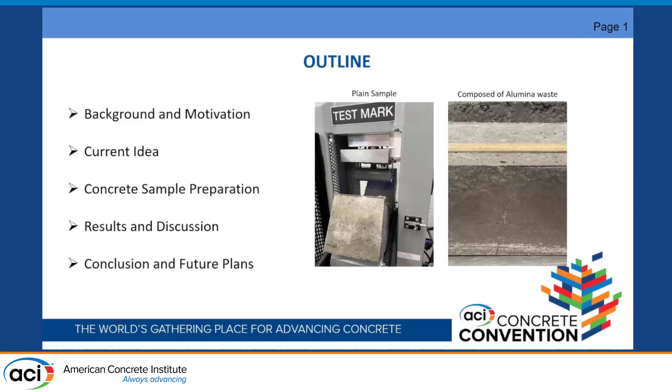My name is Kyle Ingersoll. I'm currently an undergrad research student at Alfred State. Today I'm going to be talking about some eco-friendly concrete, utilizing recycled glass and alumina waste in the mix for a more sustainable construction. So we're going to talk about some background and motivation, our current idea, some of our sample and testing, and then we'll look at the results and make some conclusions there.

So the original idea for this project came from Governor Kathy Hochul's announcement in 2023. She's put over $20 million in funding work for sustainable management practices in conjunction with the New York State College of Ceramics at Alfred University. This is the school that we partnered with. They're right across the street from Alfred State, so it works out quite nicely.

And they are the #1 school in the nation for ceramic engineering and I think #2 in glass research. So they're a big deal. We're very fortunate to have them so close and willing to help us out. So this was kind of the motivation: the governor pushing for more of this and adding some funding to this research.

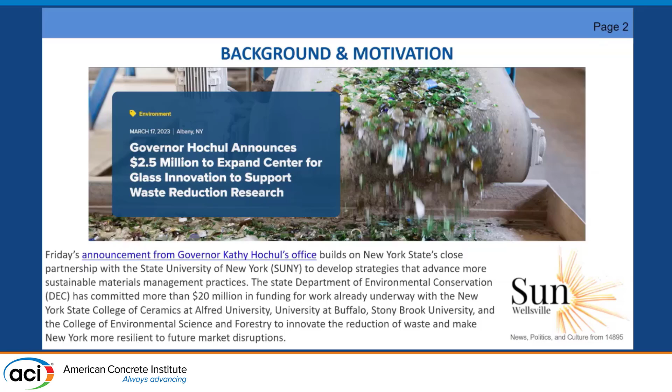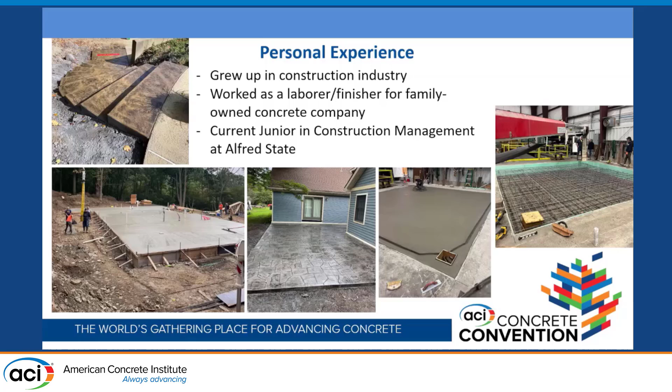And then my personal experience, I'm not the traditional, I guess, research student at a lot of these. I grew up as a concrete finisher, laborer. My dad had a company. So I've been on a lot of really cool jobs. I consider myself very lucky. Did a lot of stamp work there. You can see a 100-yard slab on grade. So I try and offer a different perspective to this research, and I live and breathe concrete. I love this stuff, so I'm glad to be a part of it.

But when we talk about recycling in New York State specifically, where and why is it favorable? If you look at the picture here, the green dots represent zip codes where recycling is favorable and it's more common, and the red dots represent landfilling as a more common practice. So really the main areas that are doing a lot of recycling are in the Hudson Valley and Long Island. Our area is pretty red, but again, that's why we're doing this.

We're pushing this, and going along with our research, SilicaX out of Spokane, Washington, one of Alfred University's partners, right now they're working to convert waste glass into a foam aggregate with high resistance to oceanic corrosion for retaining walls. So you can see on the bottom left there, that's some of what these retaining wall coupons look like, and those are currently being sunk into the Long Island Sound.

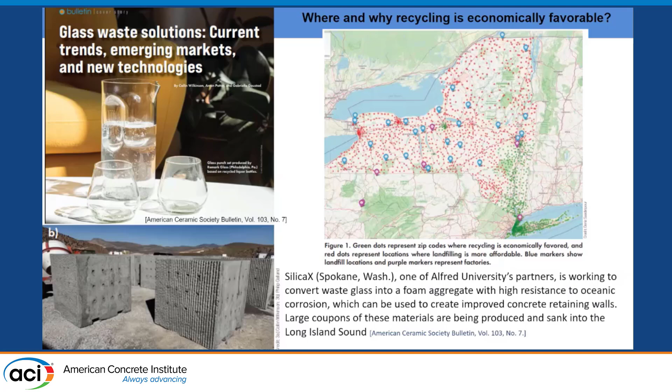But the current idea, basically using recycled glass waste or alumina waste as a replacement of fine aggregate, assessment of that concrete, and further optimizing the process from there. So you can see we have the recycled glass on the left there and the alumina waste on the right. We'll get into this a little bit more, but the recycled glass especially, we didn't get the best samples for our original tests, which kind of influenced the data, and the same thing went for the alumina waste, but we got some better numbers later on, so we will talk about that.

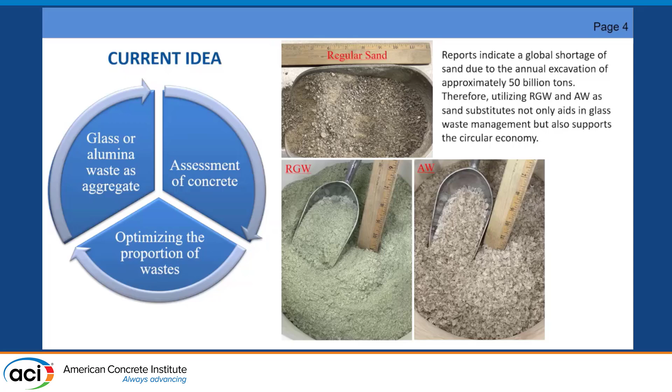But it's a big deal. 50 billion tons of construction sand are excavated every year. So if we can offer different solutions and reach a similar strength, then this definitely does have its applications. You can see this is us making the samples here. We did a 20-inch beam sample, and we did 2 runs of the alumina waste. We did 50% replacement of sand and 100% replacement.

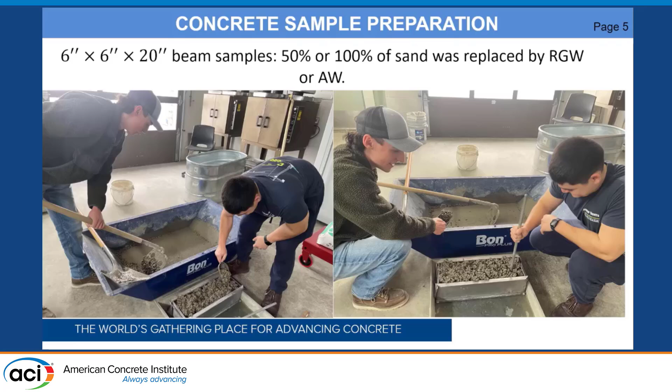And then for the glass, this project has been going on for 2 years. I stepped onto it this year. The first year we did all 100%. This year we were not able to get 50%. We weren't able to get more glass samples, so we just did 50% alumina waste. And we'll talk more about that. But yeah, for the beams and the cylinders, we did 7-day curing, and then we tested them. So you can see the molds and the curing process there.

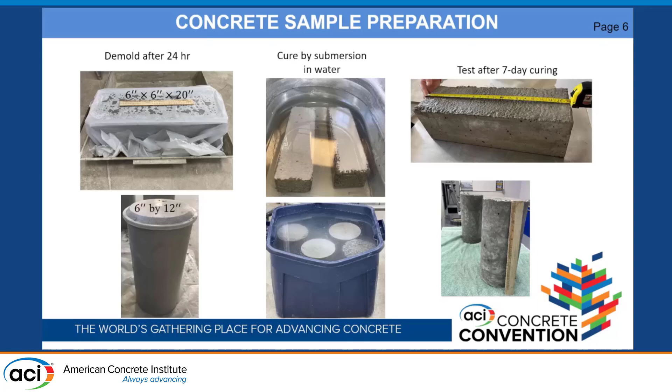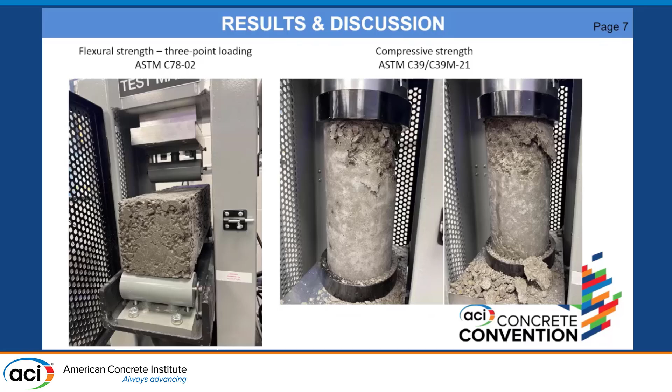And then this is our testing apparatus here. You can see some of the beams being crushed there. We got pretty nice failure modes from them, so that was good to see.

So looking at the results for 100% replacement of both alumina waste and recycled glass, you can see the plain got to about, the modulus of rupture there is about 420, 430. With the recycled glass, you can see we're sitting right about 330, so a little bit further down. And the alumina waste was between 281 and 340.

So you may be asking, well, the standard says to do three samples. Why are there only two? And it's kind of a bit concerning because there's such a jump in the alumina waste. Well, we only had so much alumina sample and glass sample. We could only run 2 tests and make the best average out of it.

So they're very busy over there at Alfred University. They have a lot going on, and a lot of their stuff is very cutting edge. So they did the best they could to supply us with stuff.

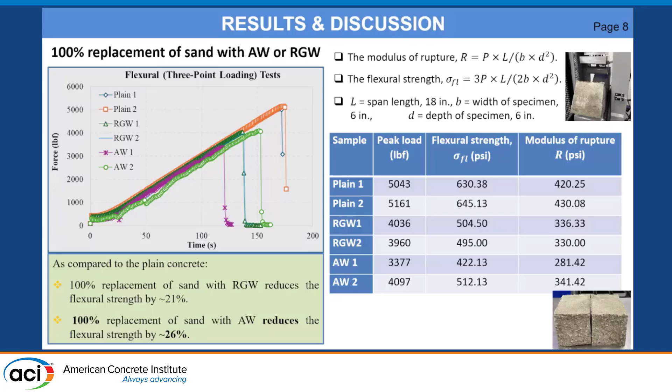But again, with the recycled glass, we see about a 21% reduction in flexural strength, and alumina waste about 26% for a 100% replacement. And again, a sort of similar story with the compressive strength. This was around a 3,000, 3,500 PSI mix plain. You can see the plain samples right around 3,500. With the recycled glass, we got to about 2,400 on average.

And again, with the alumina waste, there was a bit of a gap there, with one sample being 1,700, the other being about 2,200. So again, overall, recycled glass reduced the compressive strength by about 31%, and alumina waste by about 43%.

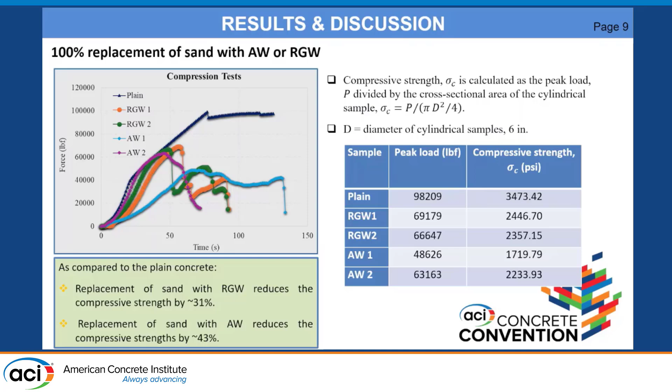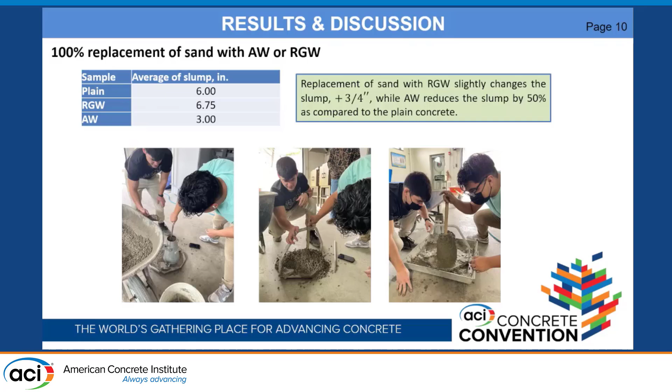And then in terms of workability, we had about a 6-inch slump design. The recycled glass got to about 6.75, so a little bit higher. And then the alumina waste dropped quite a bit, to 3 inches. So that's a 50% drop. For 100% replacement, we may want to look into some superplasticizers and things like that if you need more workability out of it.

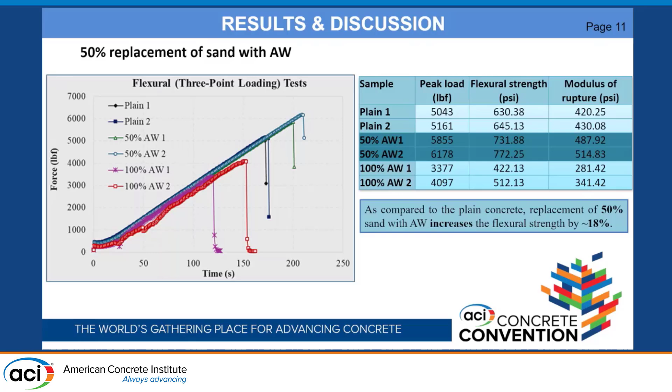So now moving on to the 50% replacement. This was the part of the project that I was mainly on with the alumina waste. We saw very good numbers here. You can see that we saw about an 18% jump in flexural strength compared to the plain samples. So that was good to see. We had much better samples this year. We had a lot more uniform mix, so to speak. So I think that played a lot into it as well.

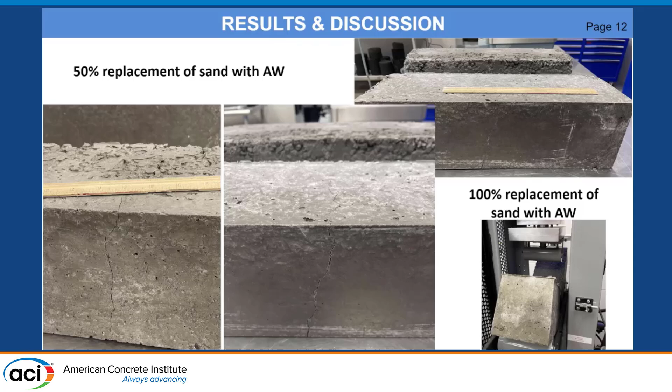So you can see these are our samples here. They had really good failure, in my opinion. Nice crack right down the middle. And as far as compressive strength goes, again, it was very promising. We saw a couple hundred pounds gained with the 50% replacement as compared to the plain sample.

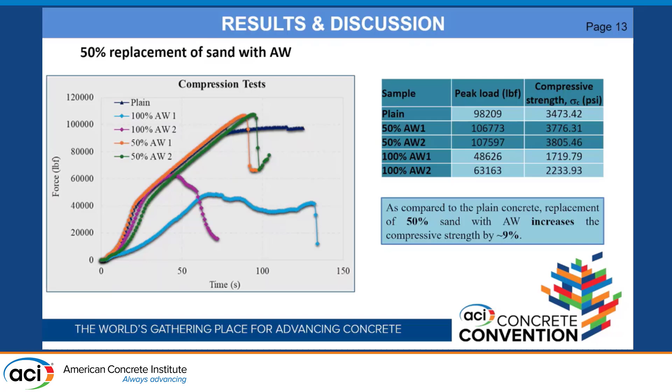And again, if you compare the 100% to the 50% replacement, it's pretty jarring. But overall, we saw a 9% increase with the 50% replacement this year. So, yeah, that was good to see. And we look at our overall data here.

We definitely want to look at different mix designs and some of the other admixtures and if you can incorporate fly ash and things like that to help it out. And 50% or 100% replacement isn't necessarily the answer. 75% replacement, 80% replacement, further optimizing that. So there's definitely a lot of work to do in the future.

As our research department is, we're kind of new to this and figuring things out. So, we're happy with where we're going, and we're very, again, grateful to Alfred University for their help, and we'll continue to work with them.

Another thing that we definitely want to look into with the glass especially is the alkali-silica reaction. When the glass research first started to come out, this was definitely a big concern. A lot of it now kind of plays into the size of the glass, and I think that goes back to what I was saying about getting good glass samples and incorporating that into the mix to help mitigate that. But again, that's something we're going to want to look into. Workability concerns, some of the different possible applications. So yeah, that's where we're at right now.